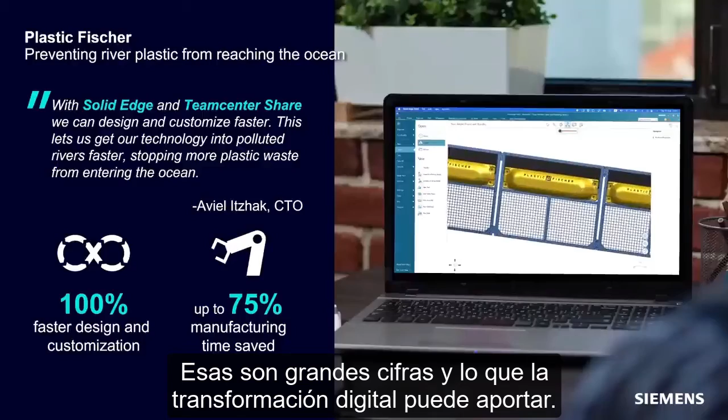We are also investing in the next generation of engineers through a new program called Hour of Engineering. This innovative program demystifies engineering and promotes it as a desirable career path by providing real-world engineering challenges connected to global goals. It helps students build engineering habits of mind like creativity, systems thinking, and collaboration. We're truly excited to engage with the engineers of tomorrow through this amazing program.

From education to startups to even larger enterprises, Siemens Digital Industries is all about helping companies like yours transform into a digital enterprise. And that digital transformation is enabled by Siemens Xcelerator. Siemens Xcelerator is an integrated portfolio of software and services, and it really blurs the boundaries between traditional standalone domains like electronics, mechanical, and software. It really ties all those together into one seamless whole. And Siemens Xcelerator really starts with Solid Edge.

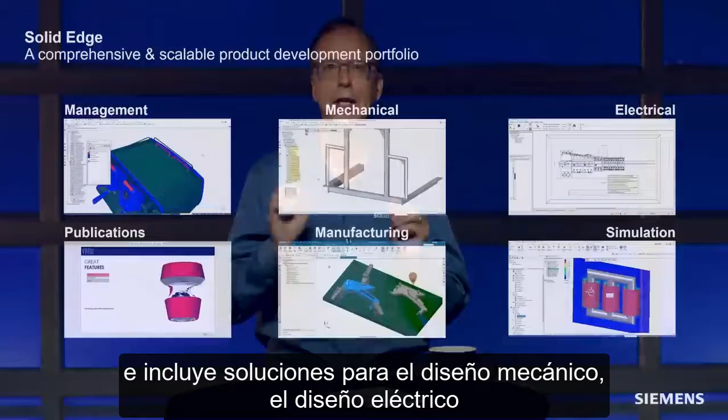Solid Edge is a key part of the Siemens Xcelerator portfolio and is focused on the requirements of small and mid-sized manufacturers. Solid Edge enables manufacturers to create a comprehensive digital twin of their products and includes solutions for mechanical design, electrical design, simulation, manufacturing, and publications. It also includes solutions for data management for all the technical data that's created and consumed when supporting the comprehensive digital twin. It facilitates collaboration both within manufacturing companies and with external resources, including suppliers and customers. Solid Edge is truly your on-ramp to digital transformation.

And we can help you accelerate that digital transformation with Solid Edge 2024. Unleash the power of intelligent product design. With this year's release of Solid Edge 2024, we continue to push the boundaries of product development. Solid Edge 2024 empowers users to design more intelligently across every aspect of product development. With a continued focus on the user experience and large assembly performance, Solid Edge 2024 introduces functionalities and enhancements to automate and speed design as well as collaboration. Here are just a few.

Nine times faster graphical performance, AI assembly relationships, great advancements in intelligent dimensioning, and so much more. Solid Edge 2024 is our best release yet.

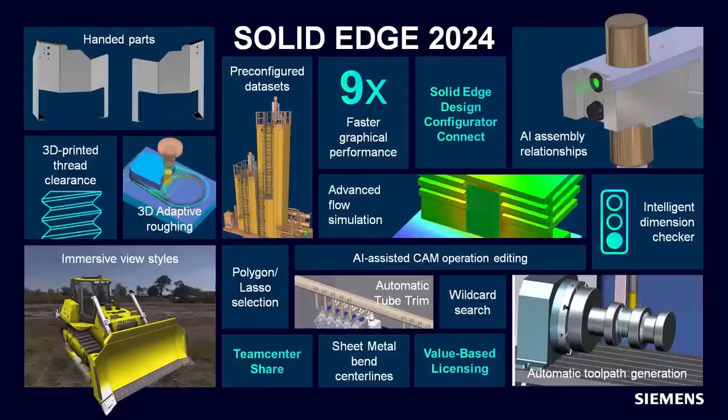Beta customers have already had the opportunity to experience Solid Edge 2024, and here's what one of them had to say: each year, Solid Edge gets better and better, everything is faster. You can definitely feel the excitement from folks like Karsten at FOCA, who've had the chance to work with Solid Edge 2024.

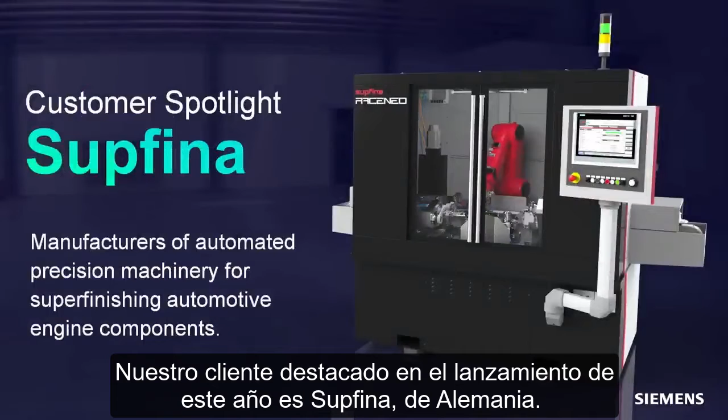Our featured customer in this year's release is Supfina from Germany. Supfina produces high-precision, fully automated grinding and honing machinery designed for super finishing automotive engine components such as crankshafts and camshafts.

Let's start with a look at some overall productivity enhancements. These are the things that will definitely make your daily life easier, and we're leveraging AI technologies in the design process to push that even further. Let's take a look with John.

Thanks, Dan. Let's dive right into this impressive Supfina machine. We'll start by focusing on the polishing tool and fixture for these high-performance motorsport roller bearings.

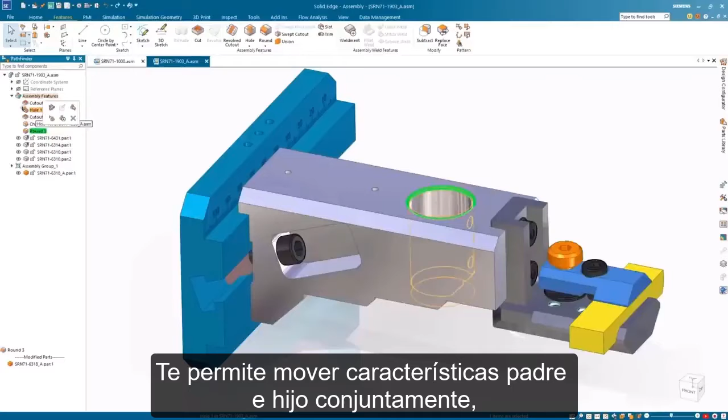By expanding the assembly features in the Pathfinder, we can see that a hole and cutouts were already added at the assembly level, and they need to be completed with a round and a chamfer. New for Solid Edge 2024 is the ability to reorder the assembly features with a simple drag and drop process, just like we can in an ordered part model. It allows you to move parent and child features together, keeping your model organized.

The polishing tool has a 3D printed component that requires two holes to be added. To ensure appropriate fit and assembly for the 3D printed threads, we can define additional clearance values. These can be input as either a percentage or an absolute value. By selecting percentage, the internal diameter will increase by a percentage of the nominal diameter, which is seen in relation to the sketch. Switching to absolute allows entry of a specific measurement.

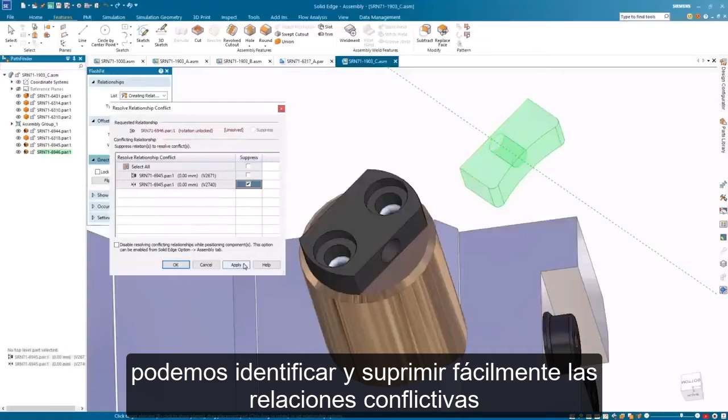To finish off the assembly, we'll add a polishing tool to the bottom of the cylinder. Here we'll add a mate and then a planar align. But then when trying to add the final axial align to correctly position it, we see it conflicts with some of the other relationships. Using the new Resolve Relationship Conflict capability, we can easily identify and suppress conflicting relations to resolve them swiftly.

This new tool helps streamline part placement and assembly relationship creation. Hovering over the listed conflicting relationships in the dialog highlights them graphically. One or more relationships can be suppressed until the requested relationship turns green, and the part is then placed correctly.

The improved Replace Part command now leverages artificial intelligence to predict solutions for replacing a single component occurrence within an assembly. The AI predictions support both planar and axial align relationships and present the solutions in a secondary dialog, allowing us to preview and select the most suitable option before executing the replacement, saving time and effort by not having to manually create relationships.

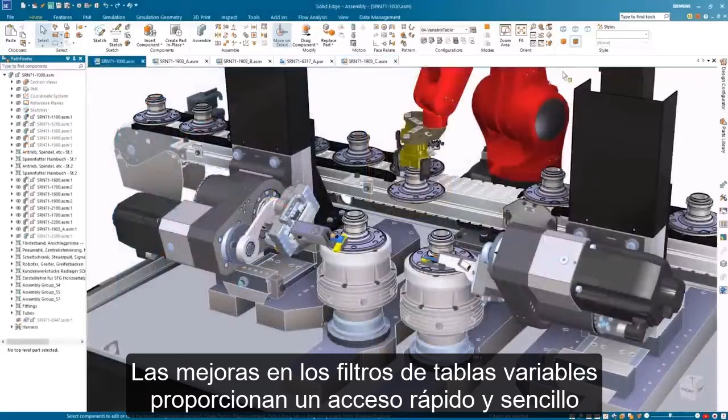Enhancements to variable table filters provide quick and easy access to filter options, resulting in an efficient experience that reduces both time and mouse clicks. In this example, variables are being used to control the position of the polishing tools and ensure they'll contact the bearing at the correct locations.

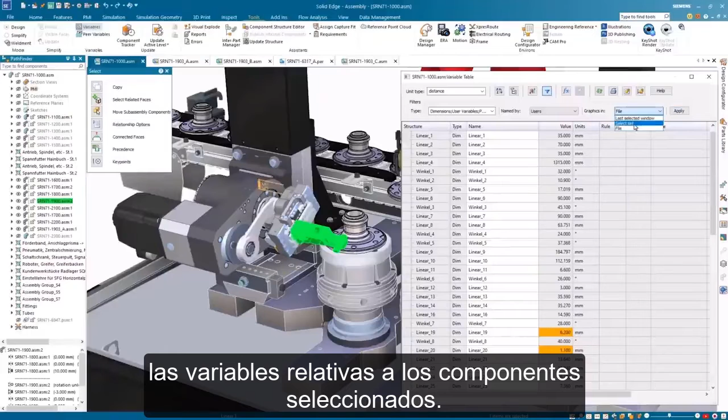With numerous variables in the assembly, the results can be filtered by user-created, system-created, or both. Another great option for filtering is to only view variables relative to the components that are selected. This makes it easy in this case to find the swivel angle variable and make the desired change, and then change the NC axis value to change the vertical height of the polishing tool.

Back to you, Dan. Super, thanks John. One of the things that you saw was physical thread clearance on 3D printed parts. It turns out this is really important because unlike manufactured parts, where standards define the clearance and high tolerances keep things working smoothly, in 3D printed parts you can get clashes that prevent smooth operation. Solid Edge automatically eliminates these, ensuring your printed parts work effectively.

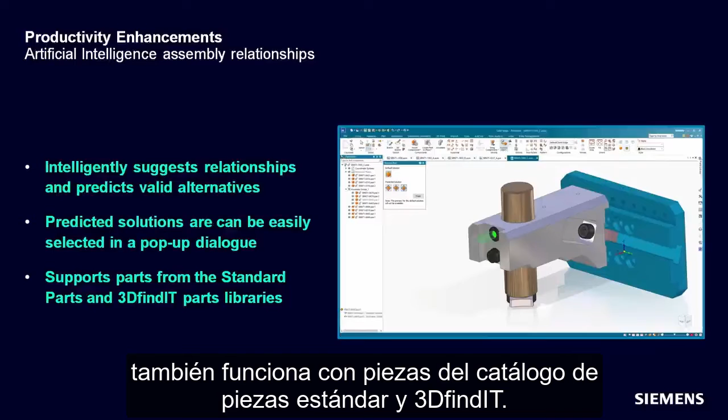You also saw the power of AI in action. With the improved Replace Part command, Solid Edge can now intelligently suggest assembly relationships and predict valid alternative solutions. The predicted solutions are graphically previewed in the design environment and can easily be selected in a pop-up dialog. And in addition to working with your custom designs, the AI-enhanced Replace Part functionality also works with parts from the standard parts catalog and 3DfindIT. Really powerful.

Here's what Dave Iverson of Ariel had to say about Solid Edge 2024. And I love the fact that he said, do more of the fun stuff. And the reality is we are often doing tedious tasks. Let the computer do that. And that's what AI in Solid Edge 2024 can deliver.

Let's take a look at some more productivity enhancements in Solid Edge 2024. Over to you, John. Thanks, Dan. Let's look at even more productivity enhancements.

Locating the right part has never been easier. Search wildcards are now supported in parts libraries, model view palettes, and the assembly pathfinder. These wildcards provide flexibility when searching and make it far easier to find what you're looking for, even if you only know part of the name. Search results display subassemblies and parts in various shades of green for easy identification.

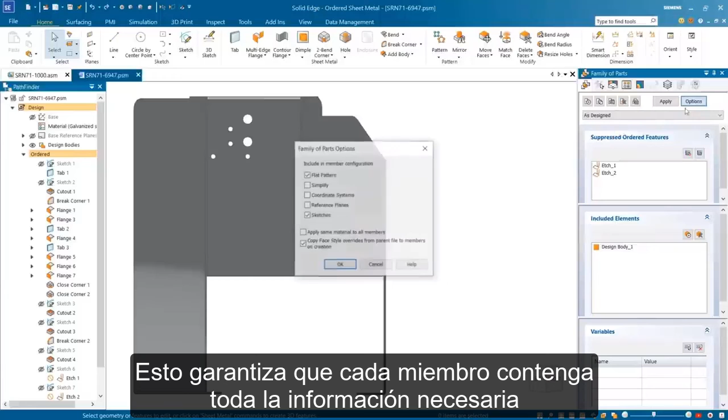With expanded family of parts options, we can now include flat patterns for sheet metal family of part members. This ensures each member contains all the information needed to create drawings and annotations. Once we define the new members, we can see further enhancements to family of parts, which include the ability to set individual material properties per member, as well as control over the suppression state of sketches and etch features. Not seen here, but we can also now handle simplified parts, coordinate systems, and reference planes too. Selecting a specific member shows the material change alongside the etch features defined for each specific member.

Greater control of selecting objects has been added with new polygon and lasso selection options. This makes many common workflows much easier, like in this case with resizing holes. Using the lasso selection option, we'll select the desired holes and change the size with ease. These selection options are available right through the product in the part, sheet metal, assembly and draft environments.

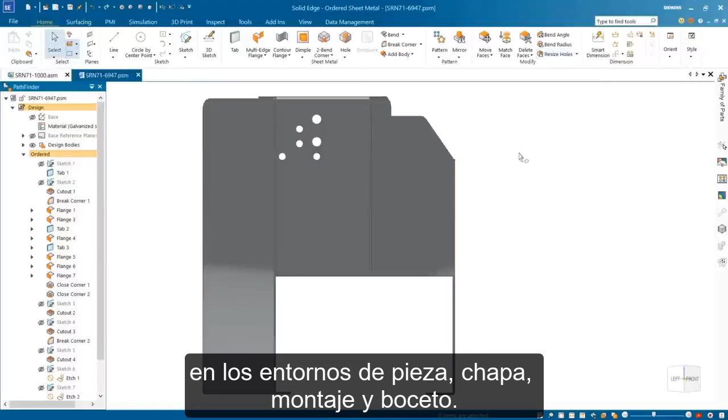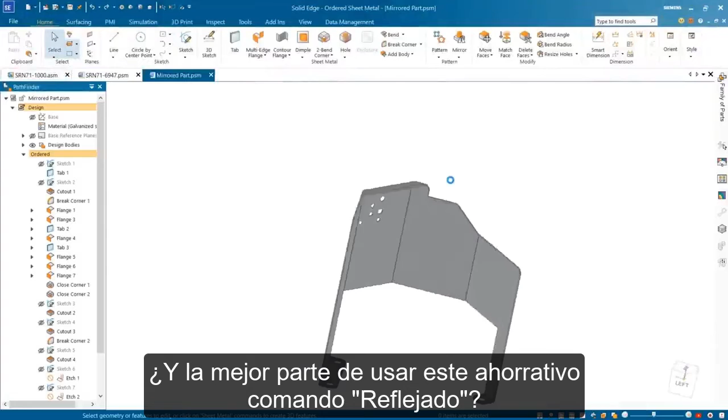Many designs require handed parts. These symmetrically opposite parts are identical mirrored copies of one another. A new streamlined workflow makes it easier and faster to create these left or right-handed parts that can remain associative to the original part if needed. With the selection of the mirror plane and a quick save, our new handed part is immediately available for use. And the best part of using the Save as Mirrored command is that all the features used for creating the original sheet metal part are carried over, minimizing errors when making downstream design changes.

The display of bend center lines is also now available in the flat pattern model environment. Here color coding defines the bend direction. Up bends are displayed in blue and down bends in green. The color and style of these can easily be modified to suit your company standards.

In Solid Edge XpresRoute, multiple pipes and tubes can now be automatically trimmed with the help of the new Trim Tubes command. In this example, after turning on the clipping planes, we can see there's overlap between the main tube and the 3 cleaning tubes. We can trim these tubes so they join together seamlessly with just a few simple clicks. Simply select the primary and secondary tubes, then Solid Edge takes care of the rest, cutting holes and trimming the ends as needed.

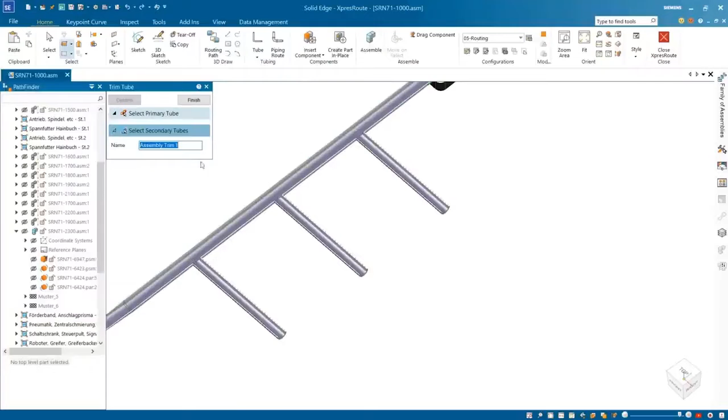Another new capability is the new Compact Recent Documents toolbar. It no longer takes up graphic space, and a single fluid click and drag quickly opens the file we need, saving time and energy.

The sheet metal cover requires some modification with the addition of several punched slots, which will locate it in the overall design. Construction bodies have been placed in the sheet metal part to represent the punches used to remove the material. Using the Subtract command, we can select the main target body and then quickly and easily choose the solid bodies as the tool step. Unwanted regions left behind as a result of this subtract operation, or disjoint regions, can be intelligently identified and automatically removed. Hiding the construction bodies, we can see all the internal disjoint regions within the sheet metal part have been removed, making the whole process quick and easy.

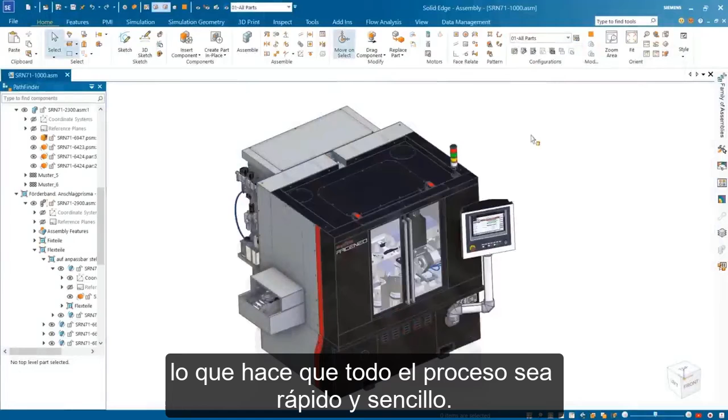And back to you, Dan. Thanks, John. Now, obviously Solid Edge has had the ability to create left and right-handed parts for many years. But did you catch the breakthrough here? Optionally, instead of just producing a body, it will create a mirrored part with a fully editable feature tree. This frankly was quite a tough problem, and we had quite a few requests for it. So we're super happy to bring this to you in Solid Edge 2024.

You also saw a ton of other great enhancements, and just to highlight a few. Now Family of Parts not only creates correctly sized bodies based on the parameters, but it also supports material, etches, coordinate systems, sketches, and more.

This was a long-standing request that we're very excited to deliver. Lasso selection can be handy in so many circumstances, and now it's super easy. An often requested enhancement, the new Trim Tubes command, automatically trims and cuts holes in the intersecting tubes in the assembly environment. It not only supports tubes that butt into each other, but also end-connected tubes can be automatically mitered.

Variable table has been really improved, allowing users to access the filters more quickly and easily, saving time and reducing mouse clicks. When placing parts, conflicting relationships can now be automatically identified, giving the user the ability to resolve the conflicts easily with a pop-up dialog that displays the issues. And so much more: matching coordinate systems, reordering assembly features, removing disjoint regions. The list just goes on and on.

Daniel Schultz of Kaiser had this to say: Siemens really listens to its customers. And it's true, we do. We really work closely with our customers and listen to how we can make things better. And this has really helped make Solid Edge the great product it is today.

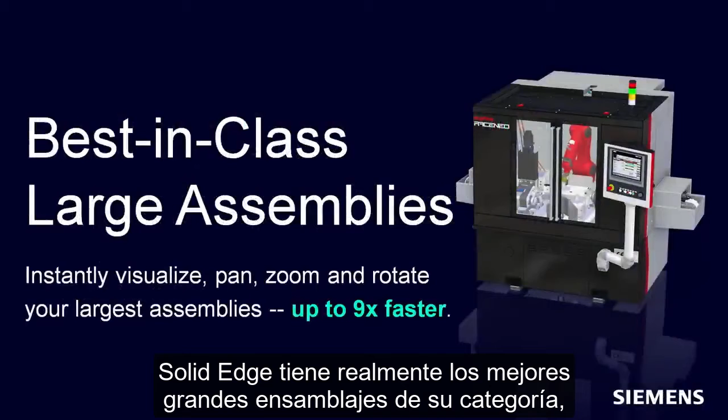Next up is large assembly performance. Solid Edge truly has best-in-class large assemblies, and now it's even better. Better model view performance allows you to view and manipulate even the largest assemblies without lags, stutters, or buffering. New immersive view styles put your models in a real-world environment that automatically updates with model movement for more realism.

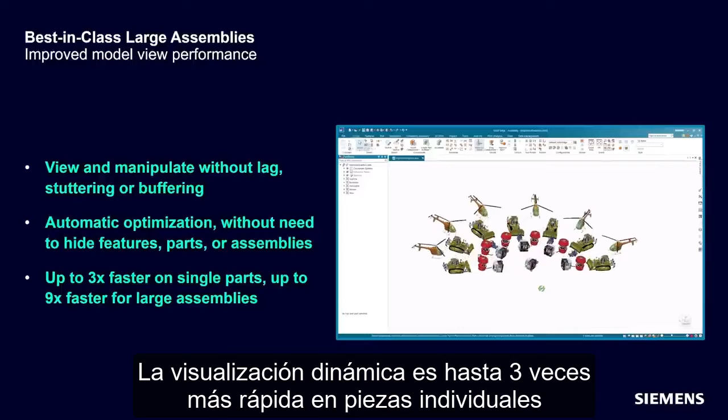View manipulation is automatically optimized, allowing users to run the most demanding assemblies at lightning speeds, without loss of detail or the need to adjust settings to hide features, parts, or assemblies. Dynamic viewing is up to 3x faster on single parts and up to 9x faster for very large assemblies. Companies like Hatch are building some of the largest assemblies in the world. And as John notes, the Solid Edge 2024 advancements can have a huge impact on their designers, as much as 30% productivity impact.

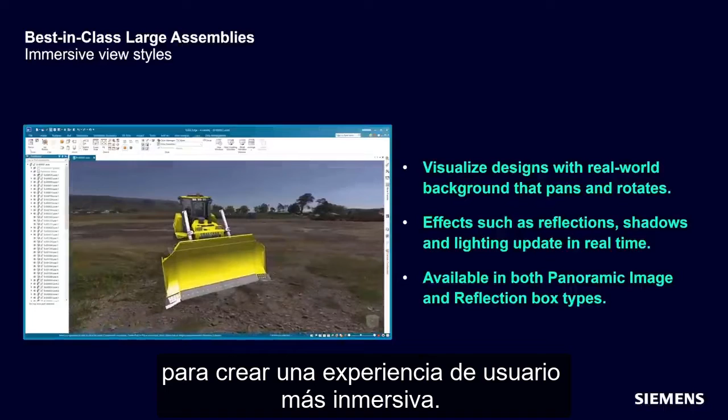In addition to the amazing speed improvements, you can also now visualize designs in a real-world background that pans and rotates with your model to create a more immersive user experience. As a design is manipulated, graphic effects like reflection, shadows, and lighting are also updated. This creates a more realistic, lifelike representation of the model in its environment. It's just like you're walking around the model in the real world.

Next up is Design Configurator, and I want you to pay special attention here because I know so many companies can benefit from this technology. Not only can you configure your own designs instantly, we are now delivering pre-configured conveyors and ladders and other equipment that's commonly used in large machines and plants. What a time saver. Let's take a look.

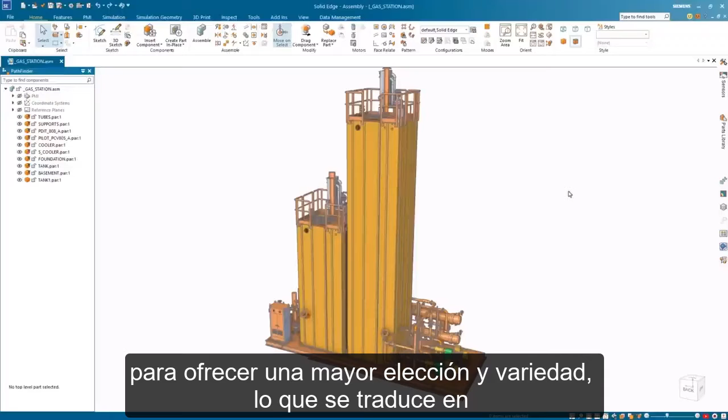Okay, thank you, Dan. Manufacturers are facing increasing pressure by their customers to offer greater choice and variety, leading to an increase in the number of product variants they need to define, author, and manage. New pre-configured models in Solid Edge Design Configurator allow quick and easy placement of intelligent datasets like ladders, conveyors, and enclosures. This helps to dramatically simplify workflows and improve productivity.

In this example, a fully configured ladder assembly is being modified directly within the main assembly environment. There is no need to go back to the sub-assemblies and configure them individually. A secondary ladder is needed to complete our design. After placing the ladder, we can customize the length. Due to the intelligent model's rules, a second section and a safety hoop in the middle are also added.

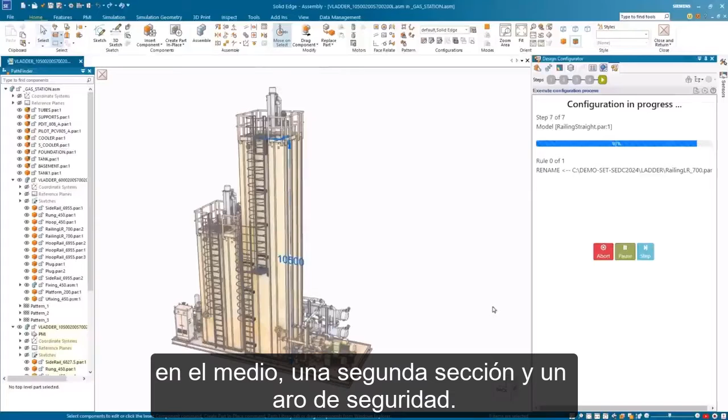To finish up the assembly, we need to add a final cabinet. The cabinet can be quickly customized inside the main assembly with the necessary dimensions and colors to fit our needs. With access to fully configured datasets such as ladders and cabinets, it has never been easier for customers to get jump-started with our Solid Edge Design Configurator.

With the new call subassembly command alongside the place part model and loop action commands, full subassemblies can be placed and configured right on the spot. Using these new workflow model actions, brand new assembly lines can be rapidly built. Here, base conveyors and other necessary components are being added to create the new assembly lines.

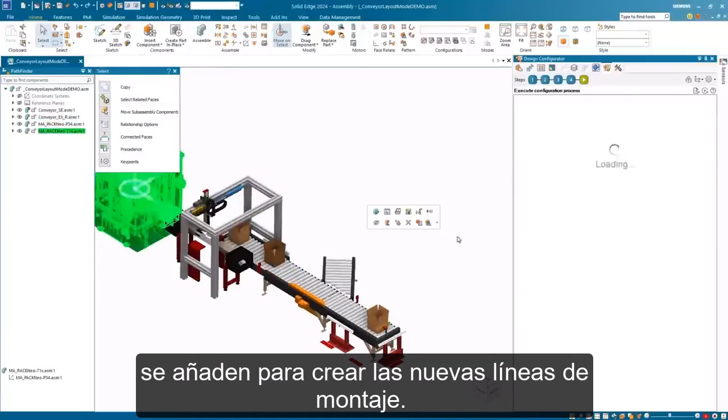Solid Edge Design Configurator can automatically calculate the number of conveyors and other components that are needed to match user specifications. By inputting a given distance, the software automatically determines the number of conveyors needed. With the last machine added, the new assembly line is finalized and ready to be used.

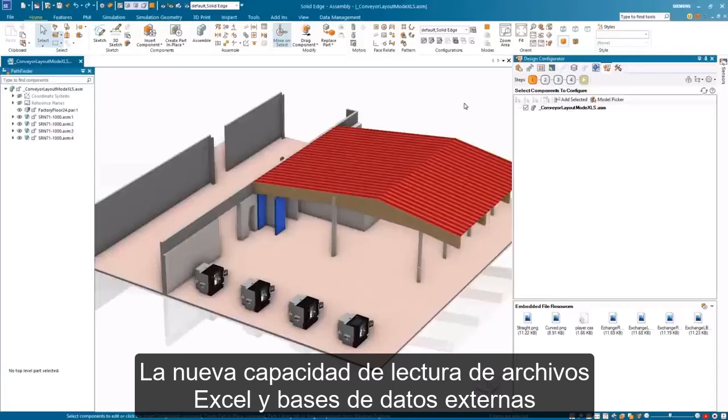The new ability to read from Excel files and external databases for input data and model actions allows you to automatically complete assembly lines in a fraction of the time. By reading the necessary conveyor placement data from an Excel file, the software instantly configures and completes the assembly line with just one click, as can be seen here.

Okay, back to you, Dan. Thanks, Sudha.

Isn't that amazing how quickly those ladders were put in place and they're fully configured in seconds? You can really boost design speed using pre-configured models of ladders, conveyors, and enclosures. One of the most requested customer features, pre-configured models downloaded from the Siemens Support Center, can now be directly used in the assembly at no cost to Solid Edge Design Configurator users.

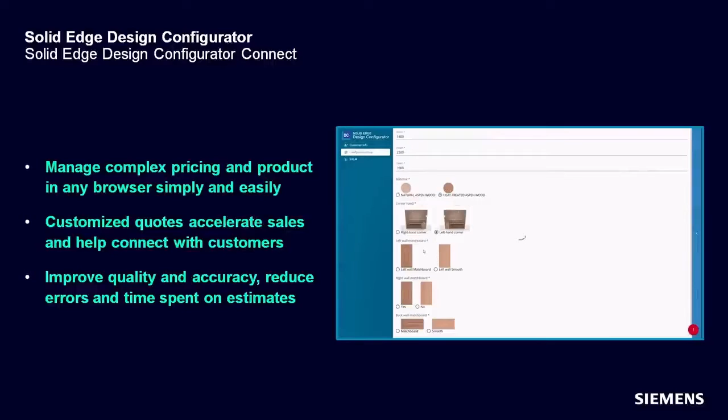In addition to all the great Solid Edge functionality you saw for configuring designs, you can also take advantage of Solid Edge Design Configurator Connect. This is a user-friendly web-based configurator that manages the most complex pricing and product configurations, allowing users to configure online in any browser simply and easily and automatically generate sales documentation, including 3D models. Connect your engineering processes with sales and marketing, streamlining design workflows with the new Solid Edge Design Configurator Connect.

Michael Orr at Ariel quickly saw the value of Design Configurator and how it leverages your data and knowledge to really streamline assembly customization. He notes that it could be a real big time saver. If, like Michael, you thought, hey, that Design Configurator can save me time and money, I'm not surprised. It's an absolute productivity booster.

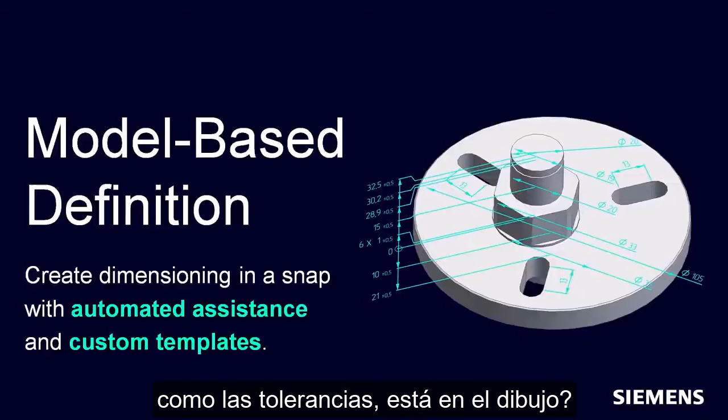Model-based definition, often called MBD, is all about moving the intelligence of the drawing upstream into the model. Why should the geometry be in the model, but critical information like tolerances is in the drawing? When we move all the intelligence to the model, we lower the 3D communication barrier and better convey design intent for downstream manufacturing processes. Here's how it works.

Sudha? Thank you, Dan. Let's look at how we can intelligently define and annotate 3D models while better conveying design intent for downstream manufacturing processes with Solid Edge Advanced PMI and model-based definition. The improved auto dimension tool in Solid Edge Advanced PMI can now be used with 1 or 2 datums for more freedom when automatically dimensioning turn parts.

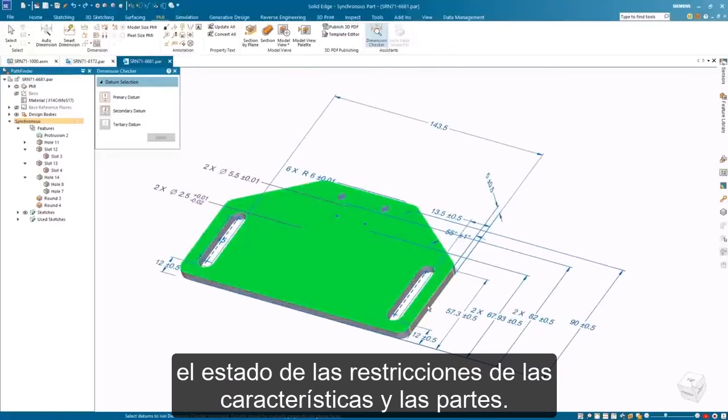Using the new recent documents preview, we will open another bracket that's been partially dimensioned. With the dimension checker command, we'll quickly and easily identify the constraint status of features and parts. The model is automatically color-coded with feature IDs, informing you of the constraint status of features and if they lack tolerance information. In this example, the slot and holes are under constraint and a dimension is missing a tolerance value.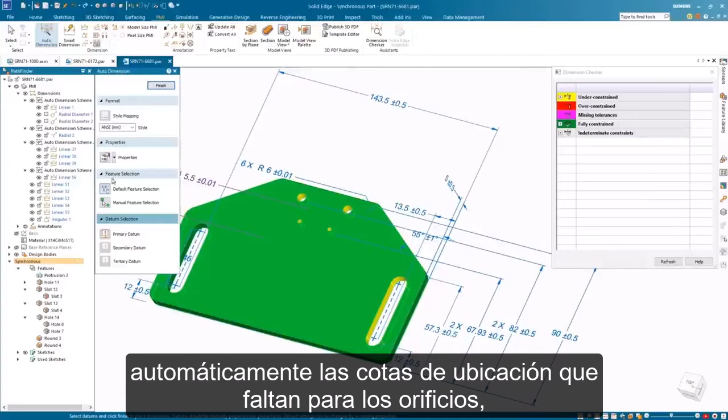By adding the necessary tolerance, Dimension Checker will instantly update with the new status, and the Auto Dimension tool will automatically add the missing location dimensions for the holes, improving creation speed. The improved Auto Dimension tool also includes stack dimensions and callouts for slot and oval cutouts. Features chosen in the selected primary, secondary and tertiary planes can be auto-dimensioned instantly.

The Common Model View command allows users to create common model views automatically with existing PMI. With the required views selected, Solid Edge automates view creation. Applying section views to a model view is easy with the enhanced vertical command bar that can be launched from the model view palette. This simplifies editing model views, as we can see here, whilst also adjusting the render mode.

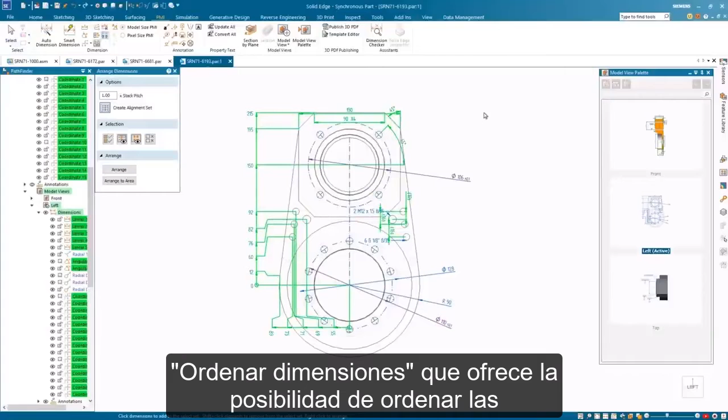To clean up the PMI dimensions, we will run the enhanced Arrange Dimensions command, which provides the ability to arrange coordinate dimensions alongside the linear dimensions. The Update Model Views automatically updates all model views when the model changes or PMI is added or removed. Auxiliary plane indicators can be added, giving us more freedom to annotate the models based on ISO or DIN standards.

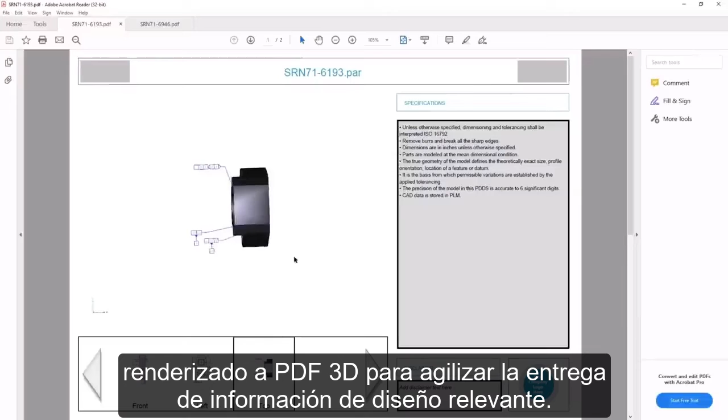We can also convey design intent for downstream manufacturing processes with 3D PDFs that can be published using templates. You can export PMI views with selected section views and render styles to 3D PDF to streamline the delivery of relevant design information. With new PMI face association, parent faces and section views are automatically highlighted when they're selected in the 3D PDF. For assemblies, 3D PDFs can contain an interactive parts list.

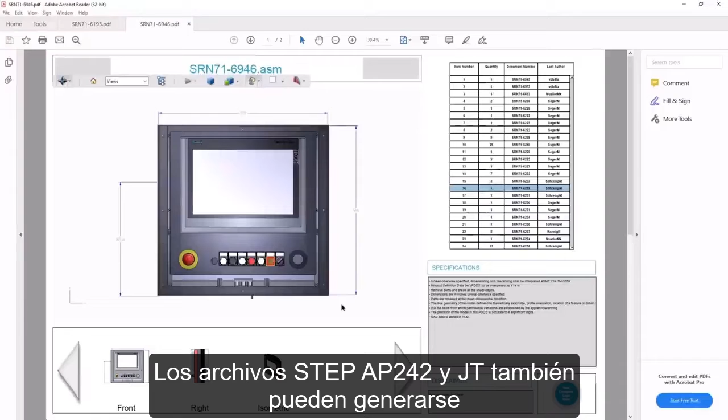On selection, parts are highlighted in the list and graphics window. Associative properties such as author can also be included. STEP AP242 and JT files can also be generated and added as attachments within the 3D PDF.

Interoperability enhancements allow your Solid Edge files to look the same when opened across the Siemens Xcelerator portfolio, including NX. The improved PMI association and support for various PMI data provide increased connectivity for downstream applications.

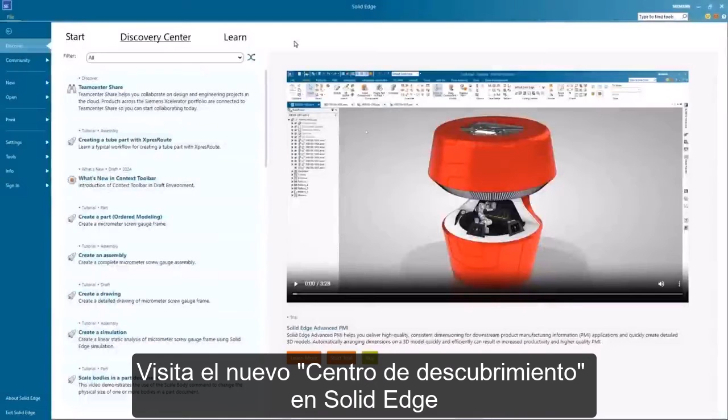Back to you, Dan. Wow, some really great stuff here, and I suggest that all companies look at this. We recognize that drawings aren't going away anytime soon, but it makes sense to move the intelligence upstream. Why have some of the information in the part and some in the drawing? Let's get to a single source of truth, the model. With 2024, there's some great enhancements here to get you on this path.

Auto-dimensioning has had a serious upgrade, and the dimension checker really lets you understand if your dimension scheme is complete. And there are many other enhancements, so now's the time to get started with model-based definition. But don't worry, you can move at your own pace, either doing drawings or creating smart PDFs. It's really up to you.

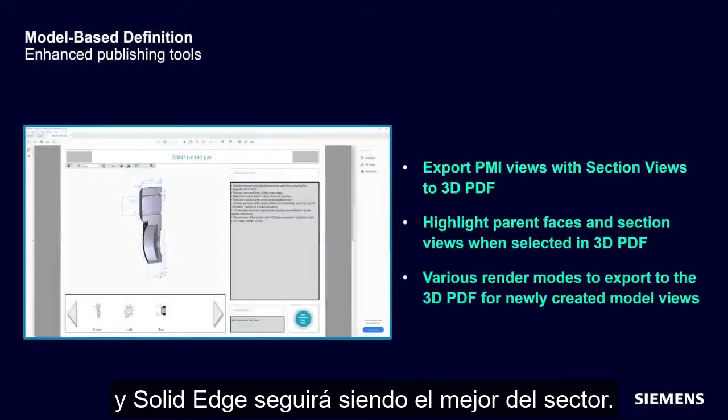I'm always amazed at how some seemingly small improvements can make such a big difference. Ken at Pello was really taken with the new, better layout that the automatic dimensioning provides, a huge help to his team. As I mentioned before, don't worry, drawings aren't going away, and Solid Edge will continue to be the best in the business.

But if you're further along in the journey and looking to publish 3D PDFs, then we have you covered. For example, 3D section views are now supported during publish, and you can now graphically highlight items in the PDF and see what's associated. This is really helpful in downstream interpretation. Companies like Kaiser are already on the paperless journey and are seeing definite benefits. Daniel sees some real savings coming as they transition to MBD and smart publishing techniques.

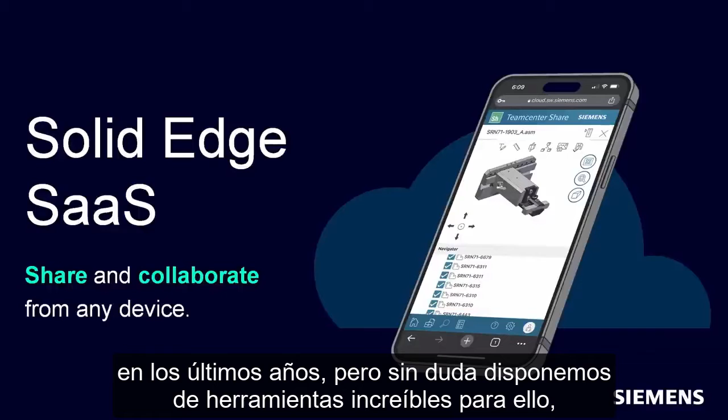We've been talking a lot about core CAD functionality, and that is truly important. But more than ever, collaboration is key to improving engineering productivity. I don't think any of us could have anticipated how distributed our teams would become in recent years. But we definitely have some amazing tools to support this, and this comes in the form of Solid Edge SaaS, where collaboration is built right into your daily work. Let's take a look with John.

Thanks, Dan. Fully embedded in Solid Edge 2024, Teamcenter Share streamlines collaboration with all your team, partners, and customers. Users can now access Share's comprehensive suite of collaboration capabilities completely within the Solid Edge environment. Opening our Supfina superfinishing machine from Teamcenter Share in Solid Edge, we get to work quickly as we look at adding threaded holes to this part we plan to 3D print. Here you'll notice the options to add additional clearance to the threads that we discussed in an earlier demo.

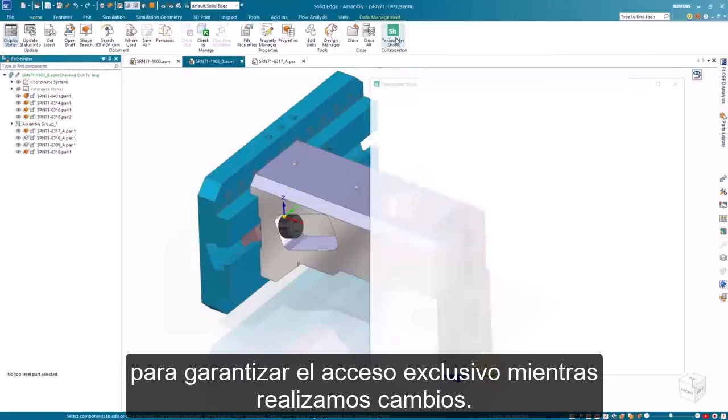Using the built-in data management capabilities, we can check in files to allow other users to make modifications, or check out an assembly to ensure exclusive access while we make changes. Again, with Teamcenter Share fully embedded in Solid Edge, we never have to leave the design environment as we create a project with just a few clicks. With Pack and Go and the Siemens connector, we can share the subassembly directly to Teamcenter Share.

Back in Teamcenter Share, within Solid Edge, we can open the project and add users to share it. Users can be granted various access levels depending on the type of collaboration needed. We'll grant this user owner rights, giving them complete access to review, edit, delete, or reassign the project. Other access levels include review, review and download, and full access.

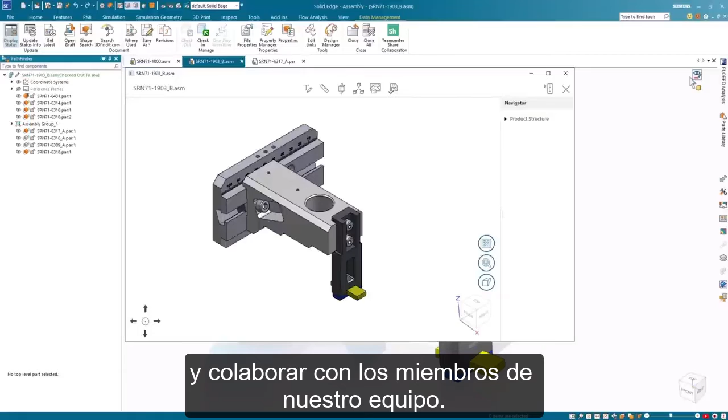Opening Viewer Markup gives us the ability to inspect the data quickly and collaborate with our team members. With the addition of threads, we want to make sure the spacing is still correct. A quick comment starts the conversation, and saving the markup makes it instantly available to our team.

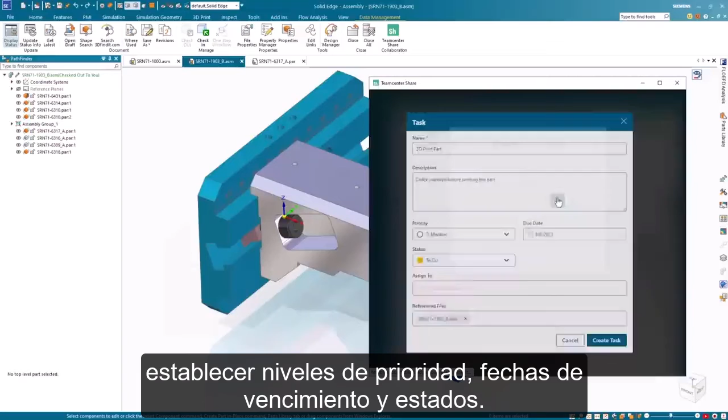Creating tasks has never been easier in Solid Edge thanks to Teamcenter Share. After naming the task, users have full control to add descriptions, set priority levels, due dates and statuses, and can assign the tasks to team members. Tasks can be viewed in a variety of ways, including on your Teamcenter Share dashboard, or as we see here, in a Kanban board. Dan, back to you.

Thanks, John. Great stuff. So you saw how you can access Teamcenter Share, a comprehensive suite of collaboration capabilities fully in the Solid Edge environment. The complete Share web user interface is embedded entirely within Solid Edge 2024, allowing for more streamlined collaboration workflows. The same browser-based experience of Teamcenter Share, still available anytime, any place, and on any device as before, but now Share is also available without leaving Solid Edge.

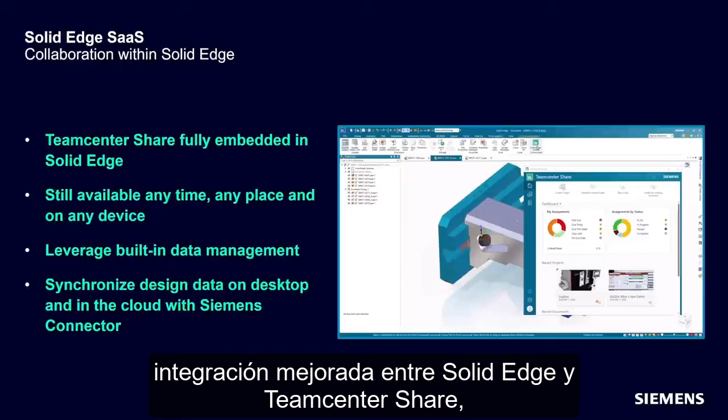This saves users time by eliminating the need to switch between different application windows. Plus, you can synchronize your Solid Edge design data on your desktop and in the cloud. Automatically installed with Solid Edge, Siemens Connector offers enhanced integration between Solid Edge and Teamcenter Share, enabling you to work seamlessly with your cloud and desktop data. In addition to the great enhancement of having Teamcenter Share embedded in the Solid Edge environment, we continue to improve Teamcenter Share as it supports products across the Siemens Xcelerator portfolio.

You can now onboard multiple users faster and easier, or share projects and assign tasks and send messages to users not currently associated with the project, attach notes to a project, files, tasks, and send messages instantly. To support ever-growing file sizes, especially those for simulation files and results, users can now upload files of up to 500 gigabytes each. Additional cloud storage packages up to 100 terabytes are now available. Ren at Sunny Bay really appreciated the improvements we've made to file upload speeds. It's just great to see how much faster it is than other solutions.

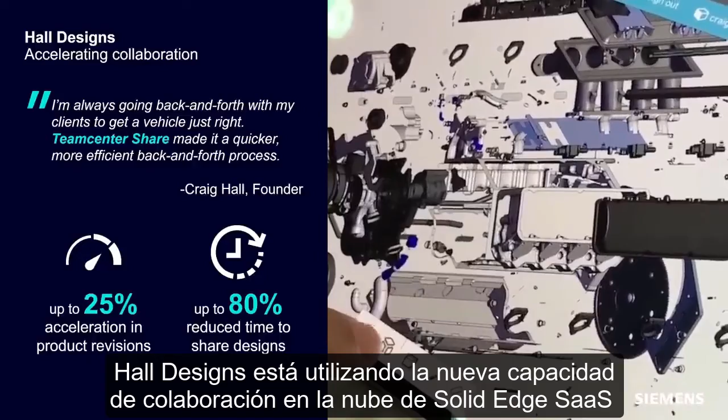In addition to Sunny Bay, many other customers are already doing great things with Solid Edge SaaS and built-in Teamcenter Share, like Craig Hall at Hall Designs. Hall Designs is using the new cloud collaboration capability of Solid Edge SaaS to collaborate more effectively and reduce their design and development time and dramatically streamline their communication with clients. Look at those numbers, 25% improvement in revisions and 80% time savings in sharing of designs. Now that's productivity.

Solid Edge CAM Pro has also received a great update. Get faster and more accurate programming with Solid Edge CAM Pro. Let's take a look with Sudha. Thank you, Dan. Solid Edge CAM Pro continues to improve productivity by leveraging artificial intelligence to suggest the most frequently used machining options in a new Prediction tab. No more hunting for options. The Prediction tab is customized for each user.

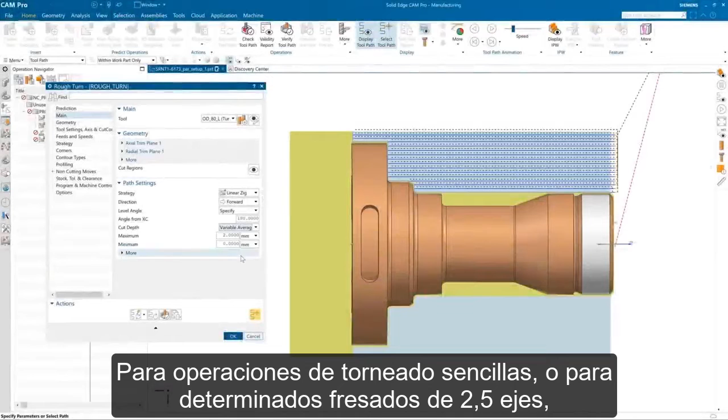Also new is Auto-Generate for 2-axis and 2.5-axis operations. For simple turning operations or for certain 2.5-axis milling, we no longer need to generate the operation. As soon as enough parameters are available to calculate a toolpath, Solid Edge CAM Pro takes care of it. This makes NC programming faster by allowing users to review results quicker. Similarly, any changes that require recomputation are also automatically performed. There is also now support for prime turning.

Using either Sandvik PrimeTurning A or B turning inserts, we can quickly, efficiently and safely remove the material from this undercut. Notice how smooth the entrance and exits are, which produces less stress during the cutting and helps the inserts last longer. Solid Edge CAM Pro introduces 3D adaptive roughing, which provides the most efficient rough machining possible. 3D adaptive roughing has reliable dynamic holder collision checking when the tool moves within a region or across multiple regions. Tool path generation is faster and bottom-up cutting has been enhanced. We also added a new option to top off flat faces for faster throughput.

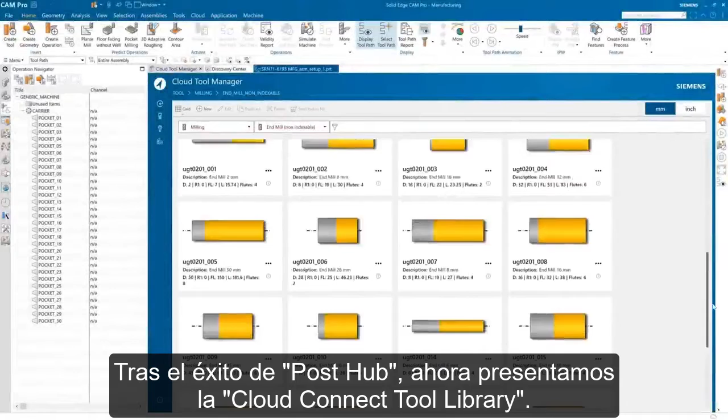Moving forward with our success with PostHub, we are now introducing the Cloud Connect tool library. As the name implies, cutting tools are now stored in a cloud database for easy access. Tools and holding devices can be easily searched, downloaded, and modified. Turn milling is a new operation subtype designed to easily machine symmetric and eccentric cylindrical surfaces with high surface quality, precision, and high cutting volume. It is used to pre-cut cylindrical parts before finish machining with other rotary milling operation subtypes. Solid Edge CAM Pro provides cutting-edge updates that accelerate machining while bringing the power of artificial intelligence and the cloud to speed your manufacturing processes. Back to you, Dan.

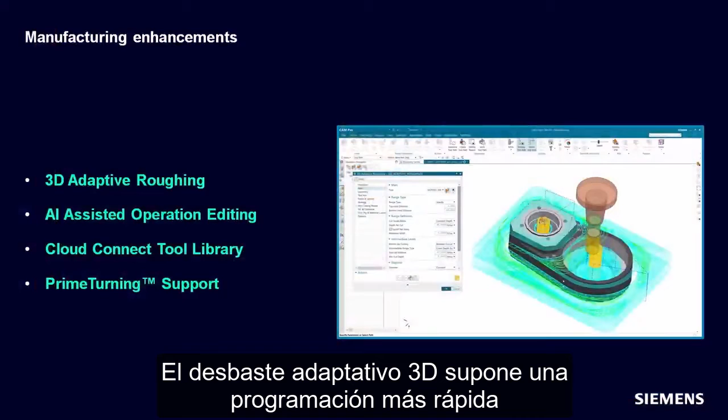Thanks. Some real time savers in there. The 3D adaptive roughing means faster programming and more efficient machining, while the AI-assisted operation editing predicts the most probable parameters, accelerating programming processes and ensuring accurate repeatability. The new prediction mode will learn from the user's best programming practices to dynamically change and predict user behavior. Cloud Connect tool library is a new application that utilizes the cloud and provides a user-friendly, intuitive experience when previewing tools and dimensions. And prime turning is now supported. Prime turning is a new methodology which enables turning in all directions, resulting in a 50% productivity increase for turning operations.

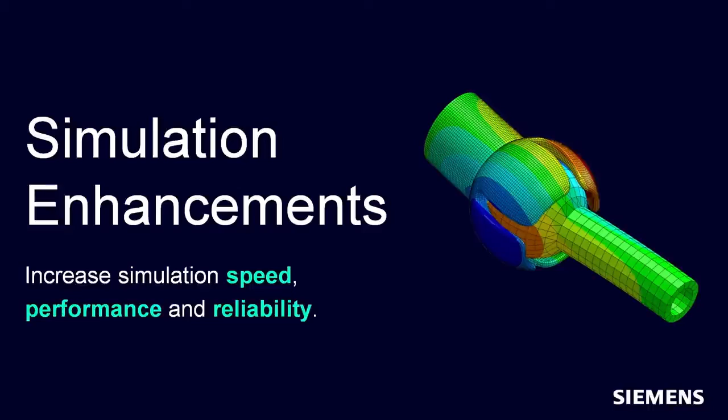Enhancements in Solid Edge simulation and Simcenter FloEFD for Solid Edge increase simulation performance and speed with improvements to meshing, structural analysis, and interoperability. Here's Sudha. Okay, thank you, Dan. New for Solid Edge 2024 is the ability to import solid temperature results from Simcenter FloEFD for Solid Edge into a static simulation study.

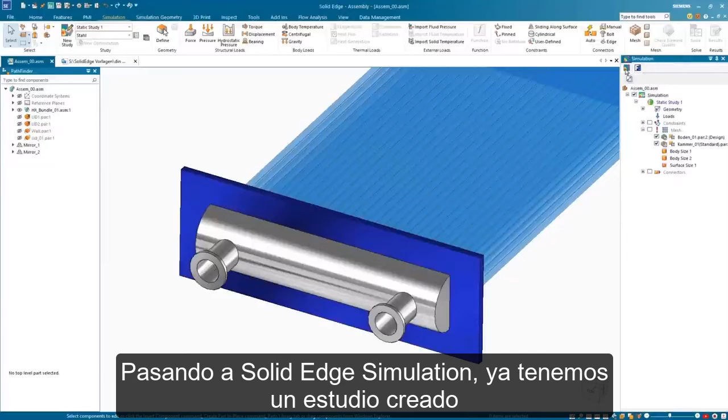Here we see the results of a FloEFD simulation in a heat exchanger and the temperature distribution of the fluid flow on the parts. Switching to Solid Edge simulation, we already have a study created with all constraints but without any loads. Using the new import solid temperature function, we can set the load for our simulation study and start the solve. The Solid Edge simulation study processes the results from FloEFD and solves the calculation.

Viewing the results, we can see there are high stresses in the parts as a result of the temperature load. This interoperability is useful for finding the thermal stresses and deformation in solids, helping understand part behavior and avoiding failures long before real products are manufactured.

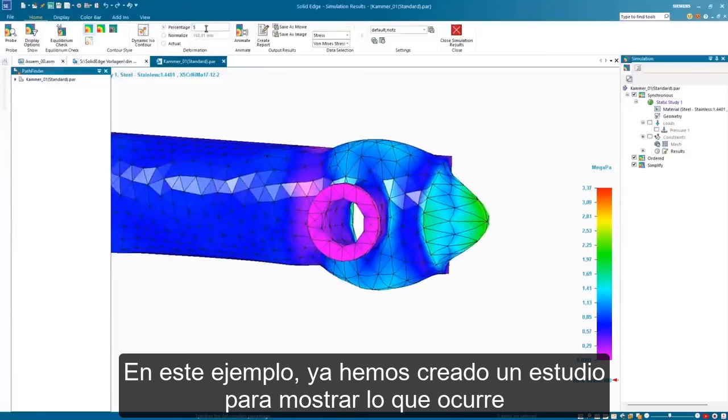Solid Edge 2024 also introduces the ability to apply a force to any user-defined point, allowing for greater control of simulation studies. In this example, we have already created a study to show what happens when the component is put under an internal pressure. With some further analysis, we can define some additional loads. An easy way to do this is simply to add a force to a point.

We have already defined a sketch, but we will add an additional sketch point that we wish to use in our study, then select this point to apply the force to. We will set the force direction, solve the study, and then review the results.

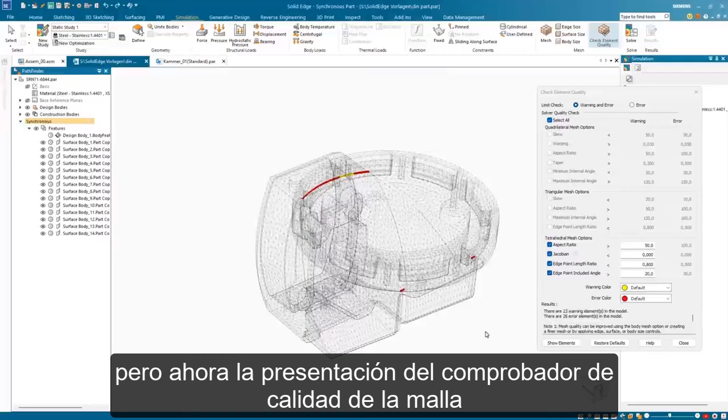Finally, we want to look at another function that is very useful for checking more complex models. Our model already has a mesh generated and we wish to analyze the quality of it with the check element quality function. It hasn't always been easy to identify the problematic areas, but now the display of mesh quality checks has been improved to make it easier to identify poor quality areas. This means users can now immediately take the necessary actions to address any problem.

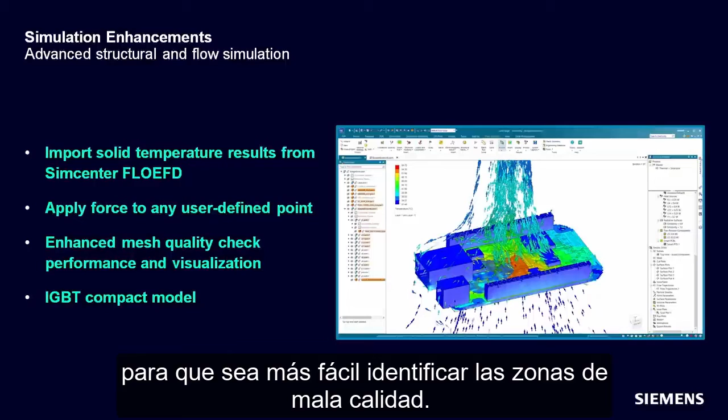Looks great. As you saw, Solid Edge simulation users can now import solid temperature results from a Simcenter FloEFD analysis into a Solid Edge study. The new option to apply force to any user-defined point, rather than just a mesh vertex, allows for greater control of simulation studies. And the display of mesh quality checks has been improved to make it easier to identify poor quality areas. Finally, the insulated gate bipolar transistor, or IGBT compact model, is now composed of an electrical element and two resistor component compact models, providing a very efficient representation of the IGBT element.

Next, I want to talk about value-based licensing, which is a truly important innovation, allowing you to explore and use a variety of Solid Edge portfolio products at a very low cost.

Rather than traditional purchasing of individual products, value-based licensing provides cost-effective bundles of license tokens that can be used to access Solid Edge add-on products on demand. You get instant access to advanced functionality that can be shared across your product development teams on an as-needed basis, and at a much lower cost than buying individual products. Let's take a look at how it works.

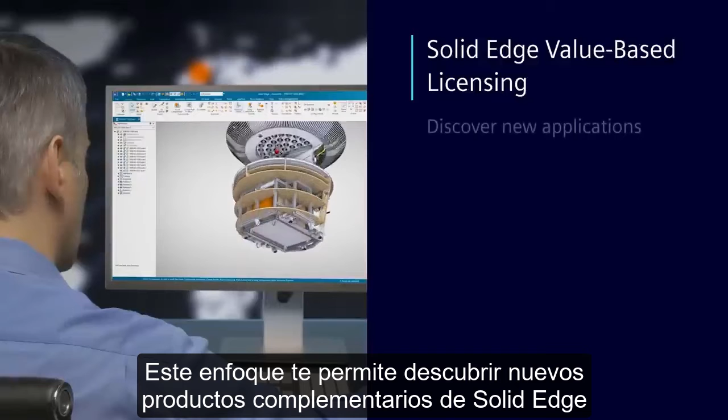New for Solid Edge, value-based licensing. A flexible licensing option to help you with the challenges of a rapidly changing development environment. This approach allows you to discover new Solid Edge add-on products while increasing flexibility for you and your team. Let's have a look at how value-based licensing works, starting with the base application, Solid Edge Classic or Premium.

Value-based licenses offer a fully flexible environment in which users can explore different functionalities. Companies acquire a set of tokens, which allow the running of a wide array of applications. Tokens are available in yearly subscription packs that make the add-on products available as a single shareable bundle. Tokens can be checked in and out to allow for maximum flexibility. Each add-on product consumes a defined number of tokens when in use.

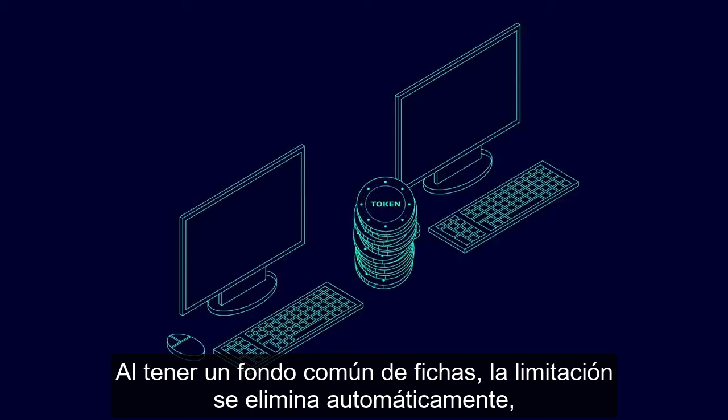The total number of applications and which specific applications that can be checked out is limited by the number of tokens users have available. Value-based licensing is even more flexible when combining multiple users, each with their own desktop and tokens. Just imagine a worker is confronted with a maximum token limit. By having a joint token pool, the limitation is automatically lifted, as he or she is able to claim unused tokens from a colleague. In this context, it's also perfectly possible for users to use the same application simultaneously, as long as the token maximum isn't reached.

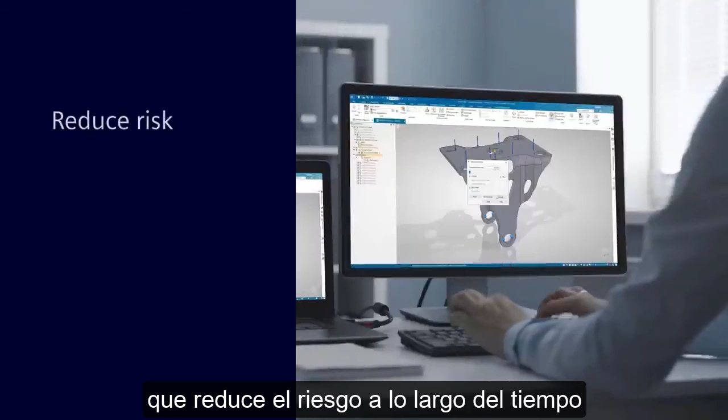Value-based licensing gives you the ability to manage costs, discover new applications, and easily scale your business. In many cases, the total investment is less than individual licenses, yet the flexibility dramatically increases regardless of whether the modules are used daily or occasionally. Value-based licensing, new for Solid Edge, offers a truly flexible, cost-effective, simple-to-scale approach that reduces risk over time and encourages users to maximally explore new possibilities.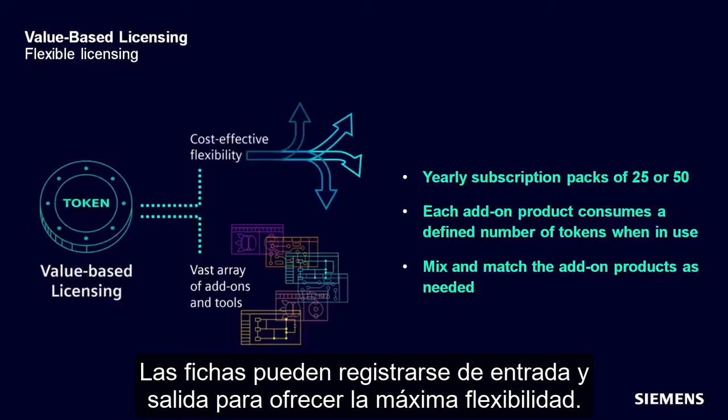Tokens are available in yearly subscription packs of 25 and 50 that make the add-on products available as a single shareable bundle. Tokens can be checked in and out to allow for maximum flexibility. Users can mix and match the add-on products as needed within their permitted token allowance. It's really the ultimate in flexibility and will give you access to technologies you never thought possible at an unbeatable price point.

In addition to all the wonderful enhancements you've seen in Solid Edge itself, the Siemens Xcelerator portfolio is the most powerful in industry. And with Solid Edge, you can connect to the many other powerful applications that are part of Siemens Xcelerator, like NX and Teamcenter. Let's take a look at how Solid Edge and Teamcenter work together closely in a product configuration scenario. John? Thanks, Dan.

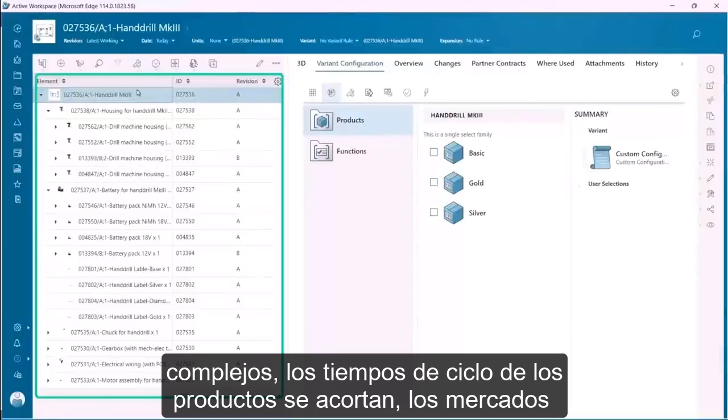Engineering complexity explodes as products become more complex. Product cycle times become shorter, markets and manufacturing go global, and customers demand more choices and customization. Companies need a solution that enables them to manage this complexity, from product inception through to manufacturing, in a simple way that enables reuse and commonality, and eliminates engineering cycles on products that will never be offered on the market.

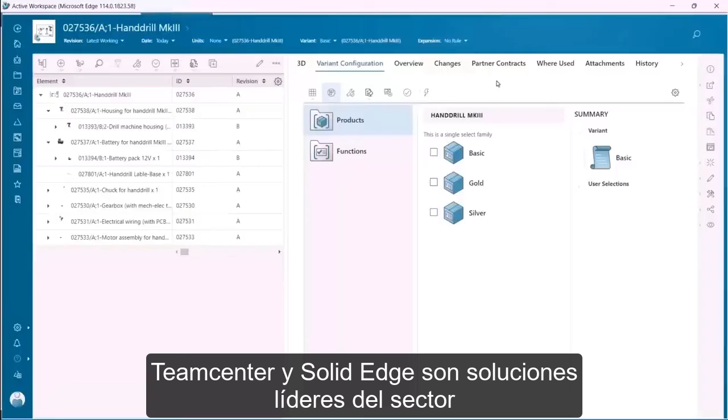Teamcenter and Solid Edge are industry-leading solutions that address these challenges with tight integration. This handdrill assembly has been configured with product family members using Teamcenter Product Configurator. We're seeing the full 150% bill of material, and if needed, we can apply a variant which updates the bill of material accordingly. In this case, the handdrill has been configured with 3 variants.

Once opened in Solid Edge, we get the options to load a 150% unconfigured bill of material, or we can select a product variant which loads a 100% bill of material. We'll select the standard basic variant from the product family and load it in Solid Edge. All the components associated with this variant are loaded. We can verify this by expanding the subassemblies to visualize the components associated to this standard variant.

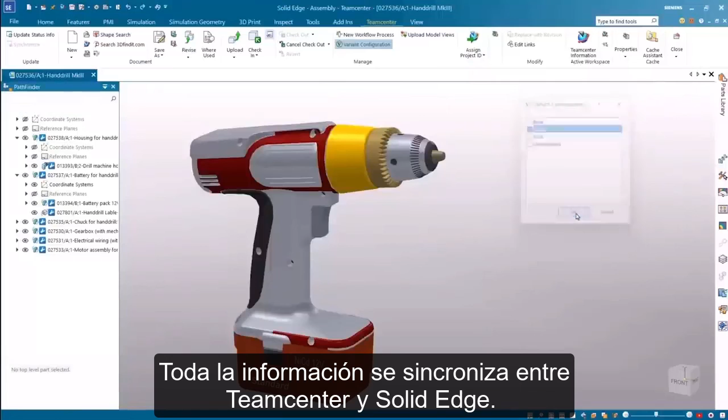The list of product variants defined in Teamcenter can be viewed, and the active variant currently loaded in session is highlighted. All information is synchronized between Teamcenter and Solid Edge. We have full control whether we want to load a different variant, load more than one variant to provide us a 120% bill of material, or load all variants to create the 150% bill of material.

If needed, we can edit any variant as we have full read-write access. We'll load the gold variant, then edit the battery subassembly to make some changes. Here we'll reposition the label component in the correct location using the appropriate assembly constraints. Dan, back to you. Thanks, John.

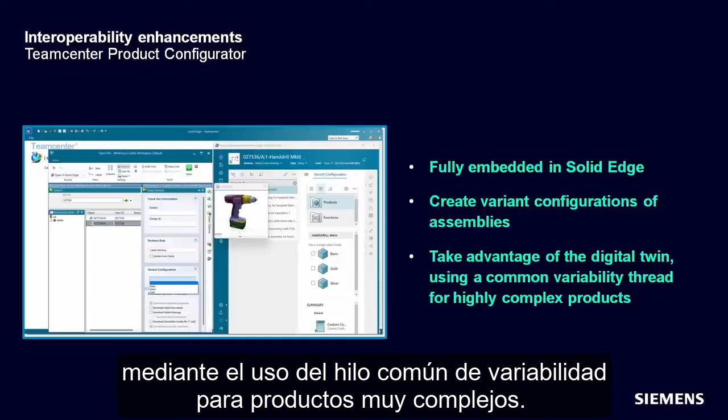It's great to see that tight integration. Teamcenter Product Configurator, which enables users to create variant configurations of assemblies, is now fully embedded in the Solid Edge environment. This allows you to take full advantage of the digital twin by using common variability thread for highly complex products. Powerful impact analysis technology is also available across the product suite.

We've also significantly upgraded our interoperability with NX. Changes to PMI in Solid Edge will now automatically update in NX, and the PMI from the Solid Edge files look the same when it's opened in NX. Support for stacked annotations, center marks, centerline, bolt hole circles, and more is now available. Additionally, assemblies created in Solid Edge that contain internal components now open correctly in NX.

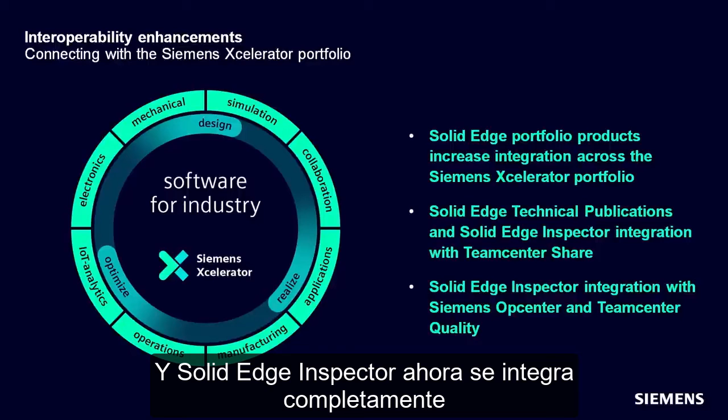We've also expanded interoperability and collaboration between other parts of the Siemens Xcelerator portfolio. For example, technical publications and Solid Edge Inspector are both integrated into Teamcenter Share, and Solid Edge Inspector now fully integrates with Opcenter and Teamcenter Quality.

At Groupe SEB, longtime Solid Edge user Olivier believes that these interoperability functionalities and others across the Siemens Xcelerator portfolio give him and his team the right solution to meet their current and future design challenges. Not only does Solid Edge work great with other parts of the Siemens Xcelerator portfolio, it also works great with data from external sources.

So whether you're switching from another CAD system or reusing legacy design data or working with suppliers, Solid Edge makes working with third-party files as easy as native data.

If you're working with customers or suppliers that use a different CAD system, CAD Direct is going to save you a lot of time. Rather than translating the file and having an intermediate file to keep track of and update, with CAD Direct you're using the design file directly. So you can, for example, directly assemble a SolidWorks file into a Solid Edge assembly.

And because this is so powerful, we've expanded the lineup of systems that CAD Direct supports, now including Inventor, Creo, CATIA, and ACIS. If you haven't incorporated CAD Direct into your workflow, now is the time.

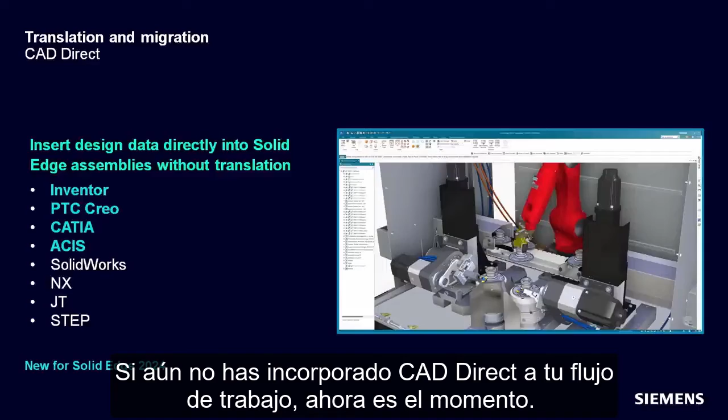And for those of you migrating from other systems to Solid Edge, we've continued to make our best-in-class tools even better. Those of you coming from SolidWorks and Inventor will see even more complete and easier-to-use tools than in the past. We've also enhanced many of our other data-sharing pathways, such as STL, Creo, and even 2D.

Solid Edge 2024 is our best release yet. We're excited to bring you all the new functionalities and enhancements because we know they'll help streamline your productivity. But don't just take my word for it.

Throughout this presentation, we've featured Supfina's Race Neo Super Finishing Machine. Let's see what Markus Müller at Supfina thinks about Solid Edge 2024.

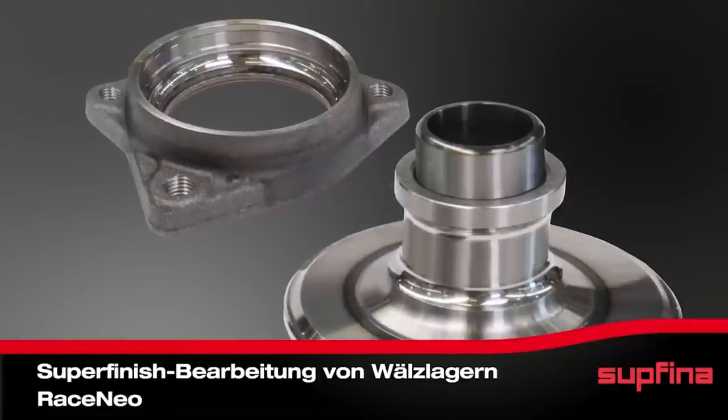We at Supfina are specialists for super finishing and any high-precision surface. We design solutions for our worldwide customers, especially for the automotive and bearing industry. With our experience and the help of Solid Edge, we can meet our customer-demanded requirements. We are using Solid Edge now for 23 years, and it's a critical component of our success.

In my opinion, the standout features of the new release are large assembly performance, cloud collaboration via Teamcenter Share, and the usage of AI-powered design tools.

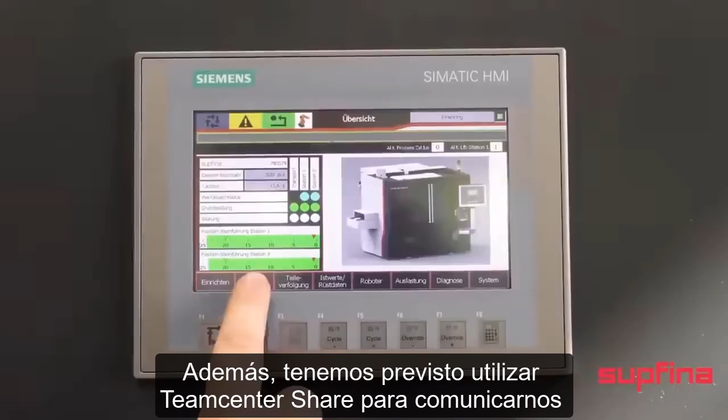Supfina assemblies are large and complex because we use them as a digital mockup. With the new release, we are able to visualize, pan, zoom, and rotate our large assemblies 5 to 9 times faster. Also, we plan to use Teamcenter Share to communicate more easily with our suppliers and external design offices. This certainly works with the great redlining and Kanban task management.

AI enhancements, especially in the area of synchronous technology, make Solid Edge easier to use. For us, that means save time for ideas and reduce unproductive work.